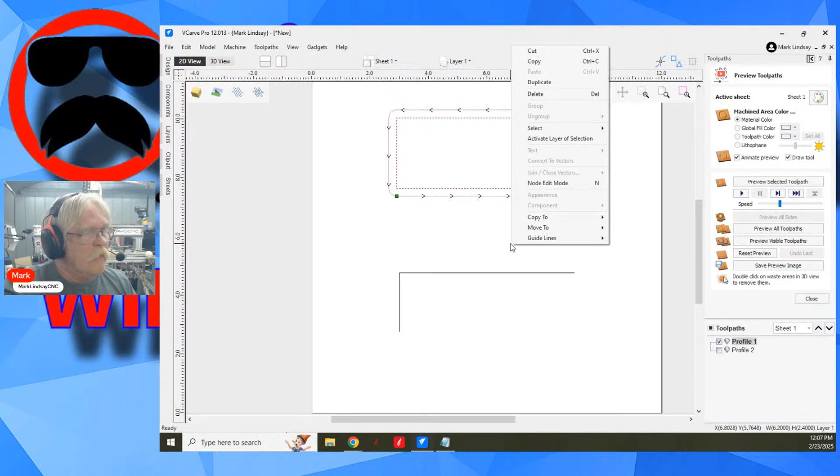The way we do that is we go into the 2D view. Now here in the 2D view, we can see that we've got a check mark in this box over here. If the toolpath is highlighted, like this one is, we can see that gray box around it - that is selected. The check mark means it's visible.

And that does make a difference. For instance, up here we can preview the selected toolpath. So if I click this, it's going to preview this toolpath because it's selected. If I uncheck this and check this one, I can preview the visible, and it's going to preview this one, even though this one is selected. There's a difference between visible and selected, is my point.

Now, neither toolpath is visible, but this one is selected. It does make a difference. It also makes a difference when you go to save G-code. Now, what we want is the toolpath visible, so we'll put a check mark in the box here.

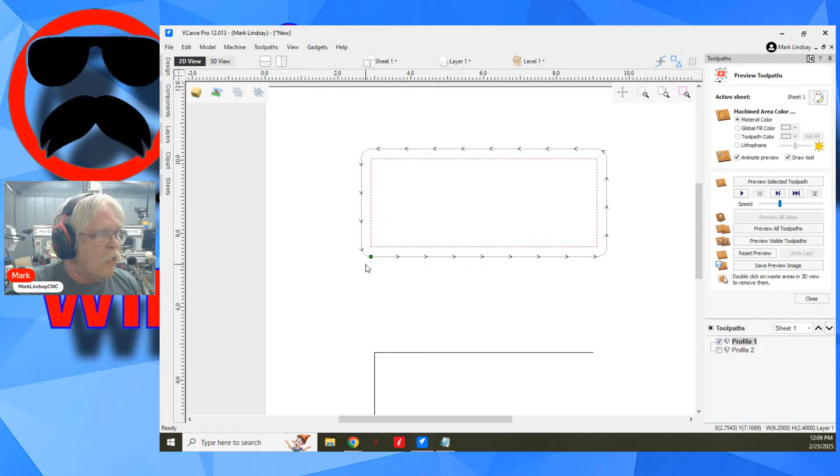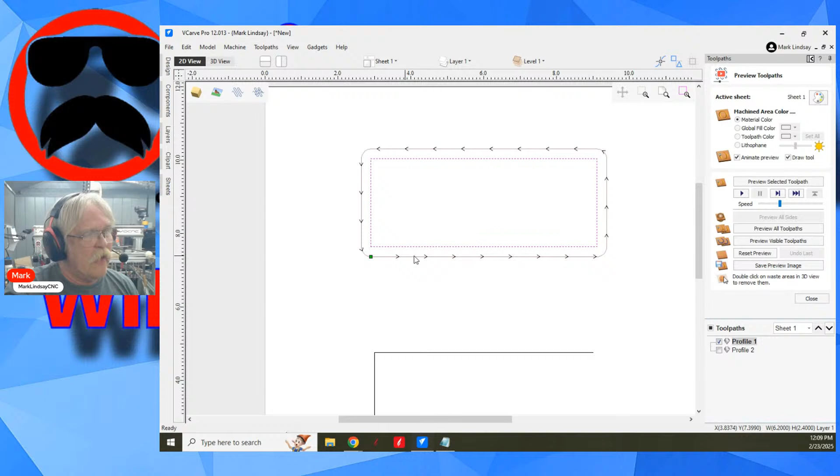Now we have two ways of showing this toolpath, where it is and where it's going to go. We can toggle that by coming up to this icon right here in the 2D view - toggle the toolpath 2D view drawing style, wireframe or solid. This is a wireframe, drawing that toolpath as a wireframe. Now if I click on that icon, it switches over to a solid view.

This is showing you exactly where that tool is going to cut. With no allowance offset, it's cutting right along this vector. It's also leaving square corners because I have that selected in the toolpath. But you can see exactly where that tool is going to cut.

Now, if I double click and go back into this toolpath, I'm going to enter a big allowance offset so it's real easy to see. We'll say 0.1, and it's a positive number. We're cutting to the outside.

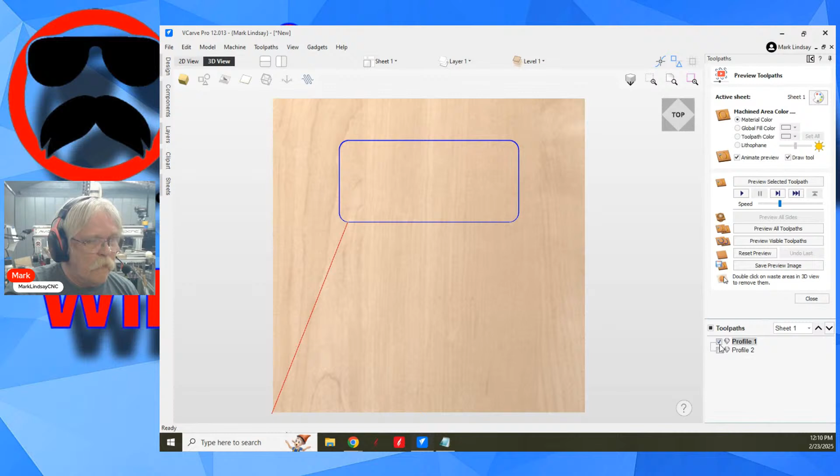So when I calculate this toolpath, it's going to send me back into the 3D view and it's going to make that toolpath visible. When I go back into the 2D view, you can see where this toolpath is cutting out here. So a positive number makes it cut further to the outside, because, again, it's a closed vector and I selected we're cutting to the outside of the vector.

If I go back in here and make it a negative number, it's now going to cut to the inside of that vector by that negative 0.1. Go back into the 2D view, and there we go. Also notice when I cut to the outside of the vector, it didn't make sharp corners. When I cut to the inside of the vector, it did make sharp corners.

So when would you use this? You would use this as a way to leave a little bit of an allowance. For instance, if you had a 1/4-inch hole and a 1/4-inch dowel, you know that a 1/4-inch anything is not going to fit into a 1/4-inch hole because they're the same size. So you could cut a 1/4-inch hole with a slight positive offset.

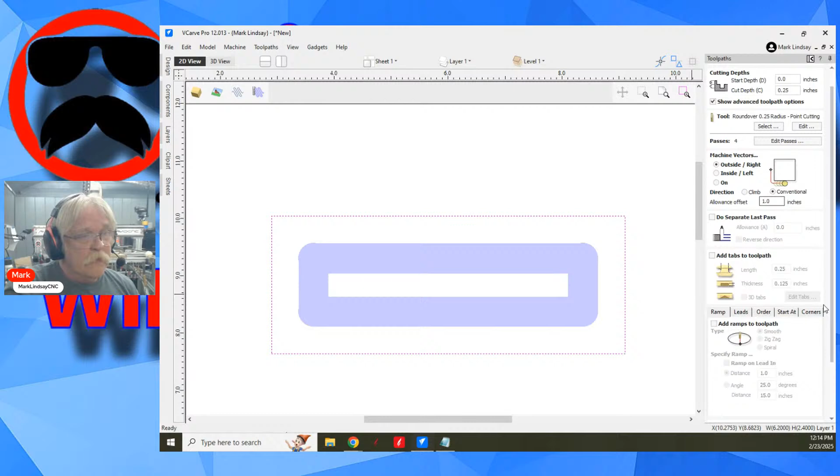And if I went to the positive and calculated, obviously it's going to cut an inch out. And again, here I would just redraw the vector. So that's on a closed vector.

And again, you access that by putting a check mark in the box here to make your toolpath visible, and then you use this last icon over here. It's going to, by default, open as a wireframe, which is this straight line with all the arrows. You click it, and it'll switch over to solid. This way you can see exactly where that bit is going to cut and how much room you'll have.

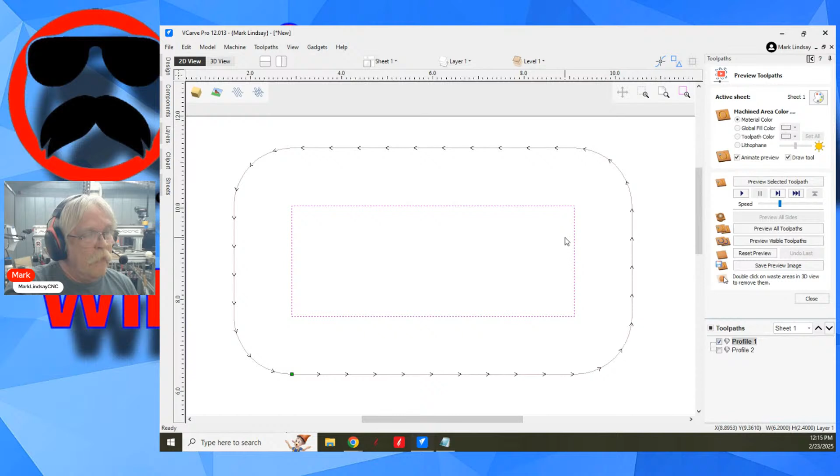So now it's a little bit different when we get into open vectors. We'll go into this toolpath here. Again, I have no allowance offset, but I've clicked to the outside right. When you're dealing with an open vector, now we're talking right and left, not inside and outside. This isn't closed, there is no inside or outside. You're either going to the right or to the left. The right or left of what?

Well, this is a tip I try to share with folks when you're first getting started. We'll go back into node editing here a minute. Tap the letter N on my keyboard. And again, this comes to this start point and this arrow. To figure out whether you need a negative or positive offset, or if you want to cut to the inside or to the outside, imagine standing on this point and looking in the direction of the arrow.

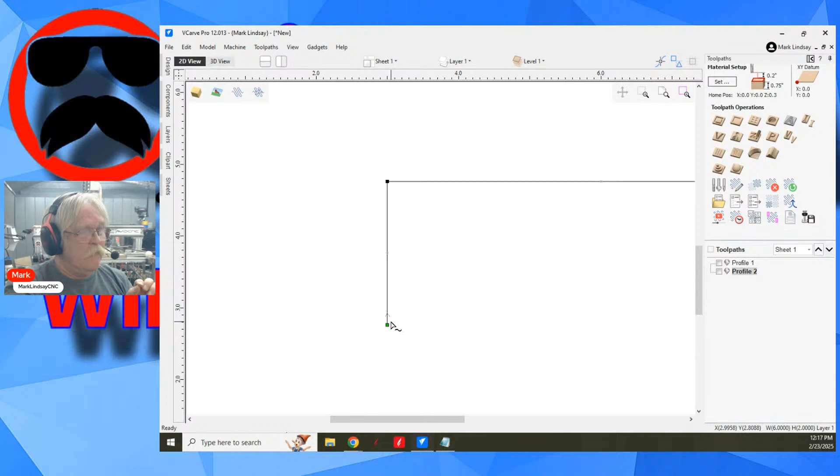Negative is going to go this way. Positive—excuse me, I got that wrong—positive is going to go this way, negative is going to go this way.

How do I know that? Because we're dealing with an open vector. If I go to the outside right, it's going to go here. A positive offset is going to make it move further to the right. If I go here, it's going to cut to the left of this vector. A positive offset is going to make it go further to the left. A negative offset is going to bring it back over this direction.

Let's make sure that I'm correct here. I've got it set to the inside to the left, and I've just added a positive allowance offset of 0.1, so it should go further over this way. Let's see. We'll calculate it, then come over here to the 2D view, and go into solid. And it did — it moved further to the left with a positive offset.

Wouldn't that depend also if you're doing climb or conventional?

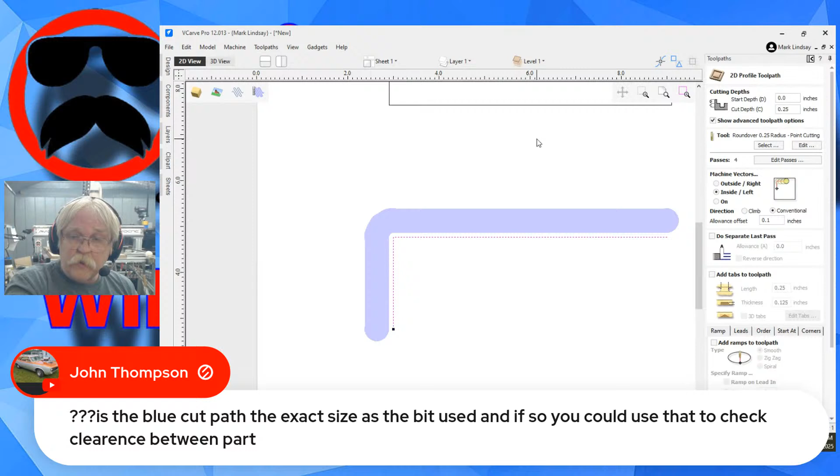Now, John just asked, is the blue cut path the exact same size as the bit used, and if so, could you use that to check clearance between parts? Exactly, yes. The blue cut path is the same size as the bit you have selected, and you can use that to check clearance between parts. In fact, I do that a lot. I use that to see how much clearance I have between parts to see should I put tabs here or not. So I might put a tab over here on this vector and then put a tab over here on this vector. That way I'm not just cutting through one tab to make another.

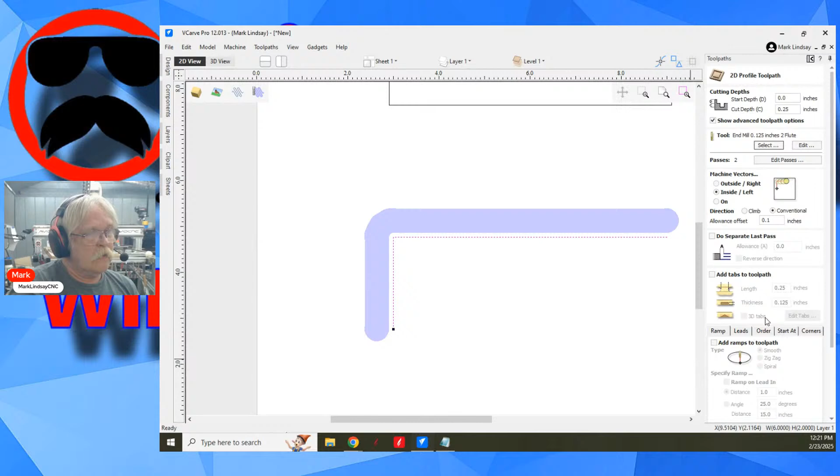So if I select, I didn't realize I was using a point cutting radius bit, that made that blue line width this width here, the diameter, 0.53 inches. Wow. Let's go with an 1/8 inch end mill. Select. And now let's calculate it. Calculate 2D view, and you see that blue is a lot narrower. But it's showing you the width of where the cutting diameter of that bit, where it's going to cut.

Now, if I come back in here and I just change this to a negative number, I'm still cutting to the outside, but now I put in a negative 0.1 offset. It's going to come back to the left. Or excuse me, to the right. I was in the Army 9 years. I should know my left from my right.

And it created sharp corners. So if you're cutting to the outside, obviously it's going to be a little bit different with a negative allowance offset.

It's going to bump over this way 0.1, which is almost the diameter of that 1/8 inch bit. So where I'm going with this is this allowance sets where this is going to cut, actually, when it goes to cut the vector. If you click on the vector, allowance offset is grayed out. You can't enter an offset. It's going to cut on that vector, no matter what you have in here. It's grayed out, I can't change it.

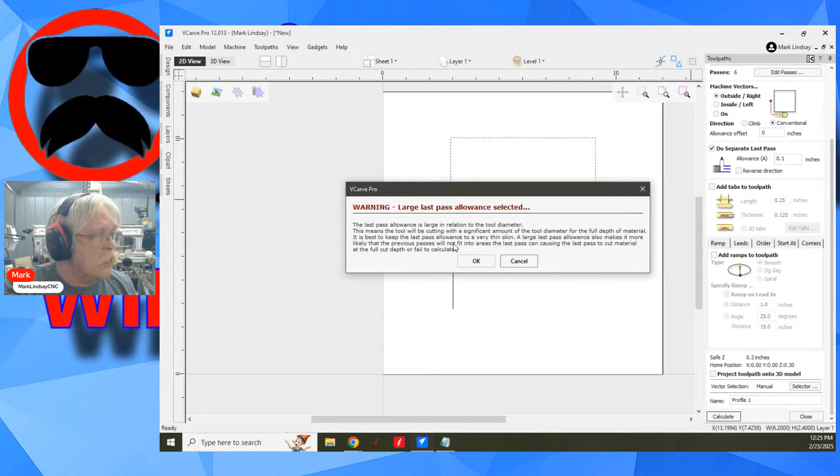I'm doing a separate last pass with an allowance of 0.01, that's 10 thousandths of an inch. Okay, in fact, I'm going to make it bigger, I'm going to go ahead and make it 0.1 just so it's easier for you to see. Now, you do not have to do a separate last pass, but I almost always do. We'll calculate it. Yeah, I know that's large. We'll do it anyway. Now, if we look at this,

we can see that we have one pass here that's inset. It's way, way inside of these other tool paths. And we can see we have two wireframes here.

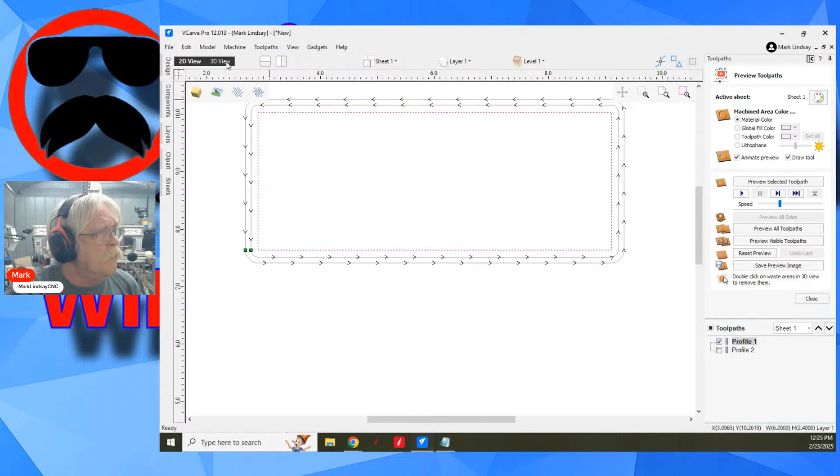Now I can put it on solid, but we can't tell what's going on. So I'm going to leave it in wireframe, but jump back over to the 3D view because that gives me a good look at what's happening here.

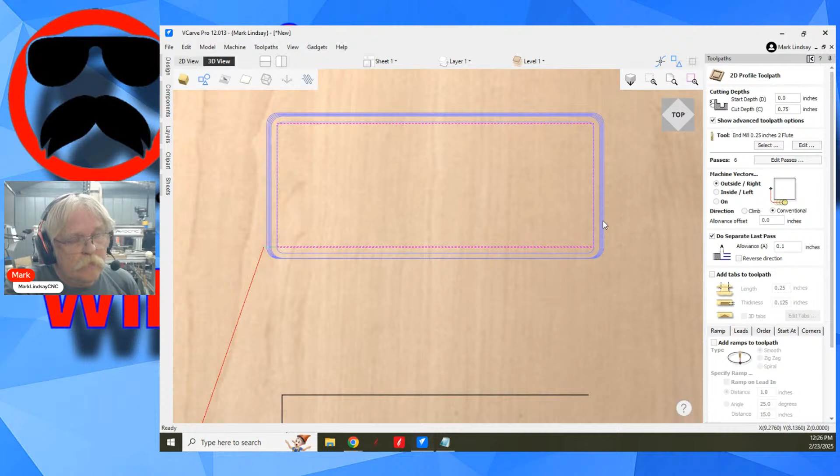What we're doing when we do a separate last pass with that allowance, it's going to take 6 passes. The first 5 are going to cut way outside this point 1, cutting it larger than it needs to be. So these first 5 passes are going to be cut big, cut oversized, that point 1 outside.

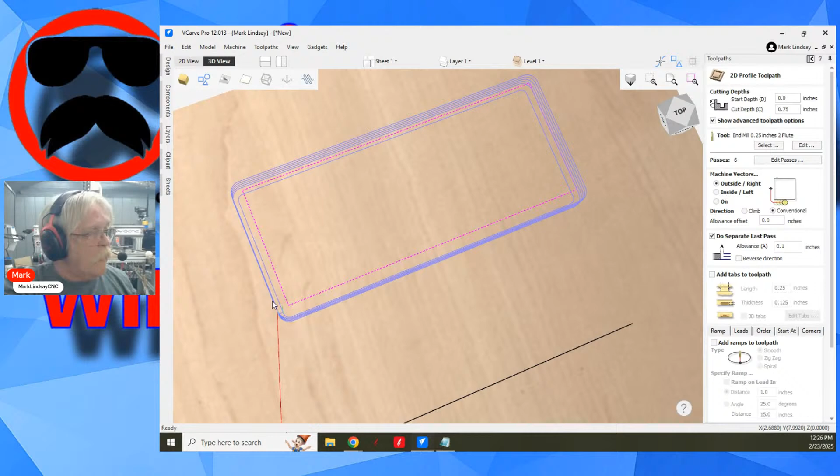Then that last pass is the lift it up here. Here we go. It's going to get around to this 5th pass and retract all the way out of the material. Move in, you can see it right here. Move in, then plunge down and make that last cut to the actual size of the vector.

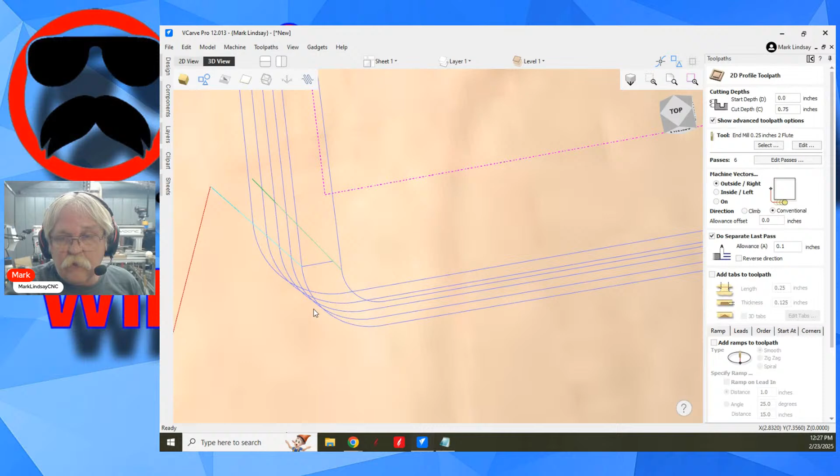Now, overall, in general, if you've ever taken a look at the edge after you've cut something out with a profile toolpath, you can sometimes see a little divot on the edge, and then little tracks all the way around as the bit has cut each depth in each one of these passes.

Doing a separate last pass with a much smaller allowance, I almost always use 0.01, no matter what diameter of bit I'm using. I've done this on all of my CNCs, from my first plywood CNC up to the Gatton CNC, now to the Avid. It will make one pass, cutting the full thickness of the material all at once, but it's only trimming 10 thousandths of an inch off of that full depth in one pass. It will remove all of those little witness marks and all of those little ramps if you use ramps and what have you. But I almost always use an allowance of 10 thousandths of an inch.

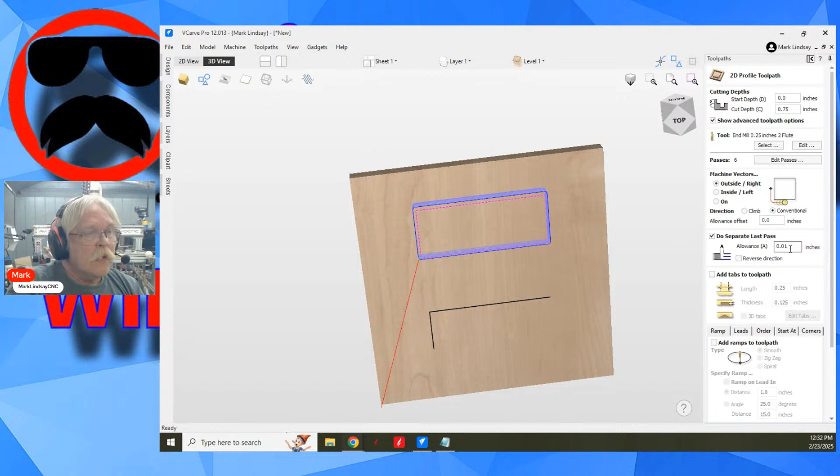I very seldom use a separate last pass if I'm not cutting all the way through the material. And also, this allowance here has nothing to do with this other allowance. This allowance is where the bit is actually going to cut on the material all the way around. This only affects a separate last pass. They will work together.

I'm assuming this is an addition to the initial allowance. Yes, if you have an allowance entered up here, it will calculate with this. You can use them together.

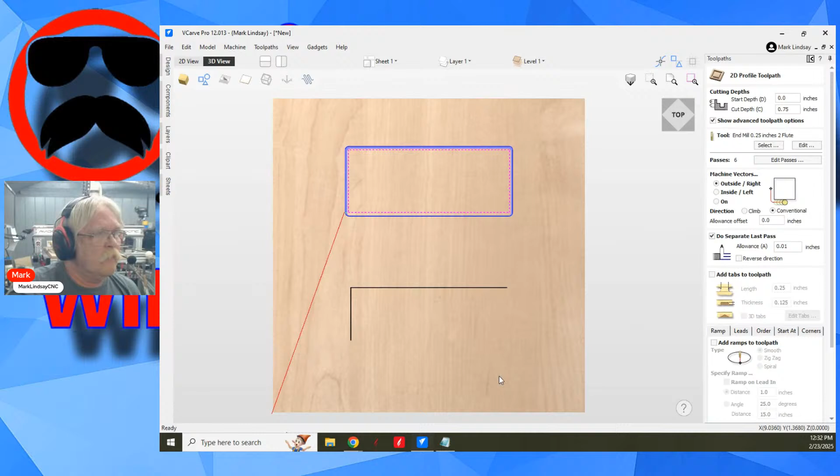So it's one of those if-you-prefer type of things. I very seldom use a separate last pass. In fact, I don't think I've ever used a separate last pass when I wasn't cutting all the way through the material. But that doesn't mean that I won't, and it doesn't mean it can't be done. You certainly can. It's just that I haven't really seen the need to, because if I'm using a profile, say, to drill a hole, it's usually because something is going to go in that hole.

Okay, let me go ahead and close this up. So I don't know if that helps you out, Kurt, or not, but there it is.

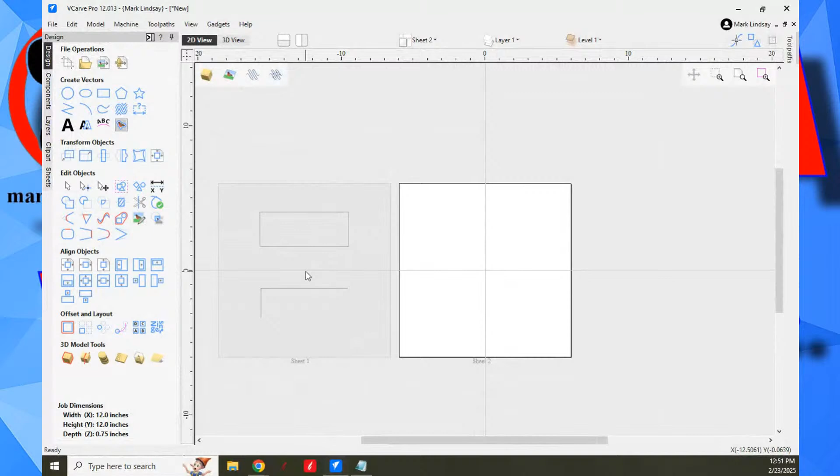Now, when you would do this, I don't know, but you may find an application for it. I'm going to go back over here into Sheet 1 by double clicking. I'm going to select that vector, then right click it, and copy to Sheet 2. So now I have that vector in both places. I'm going to come back over to Sheet 2.

I could do whatever I want with this. I could do a pocket here with an allowance offset—an allowance offset in a pocket is the same as in the profile. I could do a pocket in here, then come back over here to Sheet 1, and this is my profile. I'll do a positive offset to cut 1/8 outside, but back over here, I'll do a negative offset to cut further in, so it leaves a 1/4 inch wall. So I can do a negative offset of 1/8 of an inch and a positive offset of 1/8 of an inch, and I have a 1/4 inch thick wall.

Does that make sense? John Thumb is asking, what's the difference between sheets and layers?

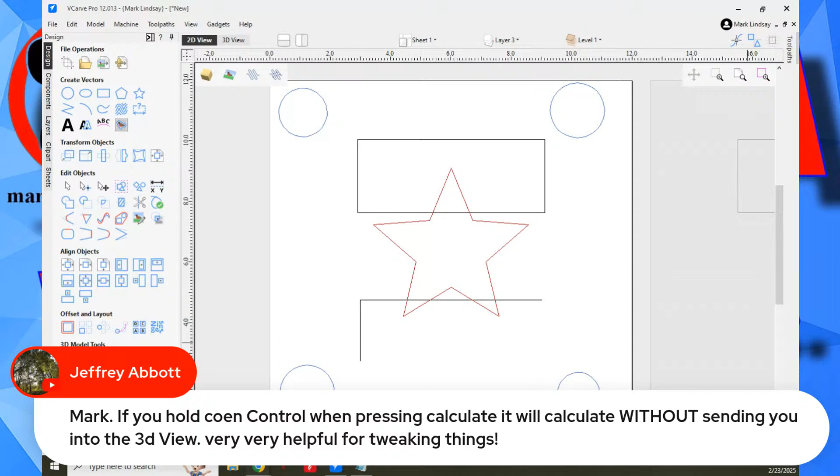Okay, now Jeffrey Abbott, I was trying to remember how to do that. If you hold down Control while pressing Calculate, it'll calculate without sending you into the 3D view. Very helpful for tweaking things. I knew there was a way to do that, I just couldn't remember what it was. Thank you, Jeffrey. What he means is if I go over here to Profile Toolpath.

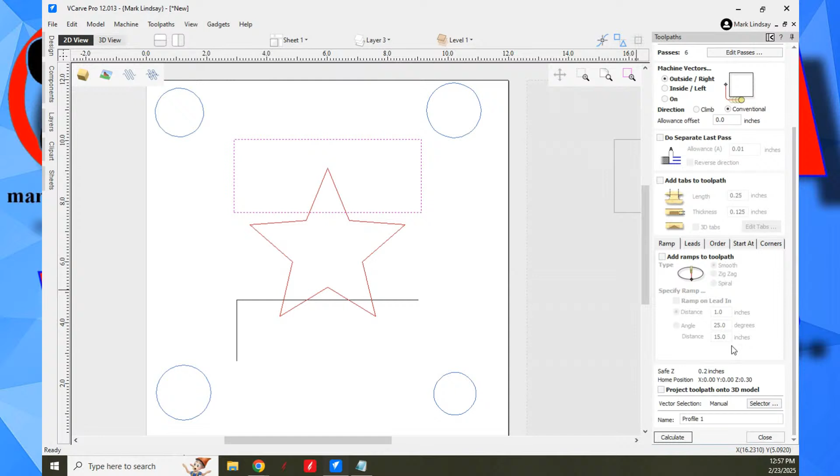I'm going to turn off Do a Separate Last Pass. And I'm going to hold down Control and click Calculate, and it doesn't automatically jump into the 3D view. I can see where that toolpath is going to cut.

Thank you, Jeff. I knew that there was a way of doing it, but it has been recalculated. So, all right, let's see here.

Do layers stay with sheets? Not yet. Not yet. That's coming in 12.5. But you didn't hear that from me.

Let's see here. Let's see, hey Mark, how do you like version 12.013? Is it worth the 287? Does it make inlays simple?

I have not done an inlay. I will be this year. In fact, I'm playing around—no, you can't see it from here. Well, yeah, you can see it from here. Right back there, there's a piece of MDF laying against a wall. I'm doing some testing right now. Not quite ready to do a video yet.

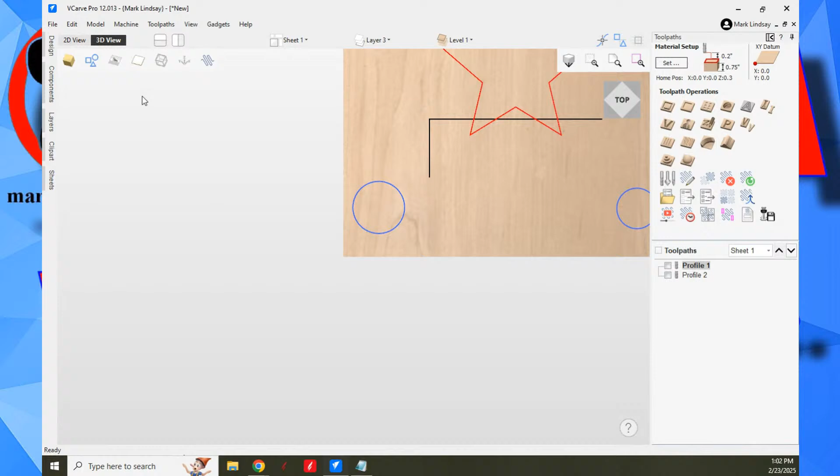All of these icons that I'm showing you up here, like how to go into the 3D view and turn on vectors showing in the 3D view, that's 12.0. You can turn them off or on. You can move and edit vectors in the 3D view, decrease a radius or increase a radius. There are all kinds of things you can do with vectors in the 3D view now that you can't do in the older versions.

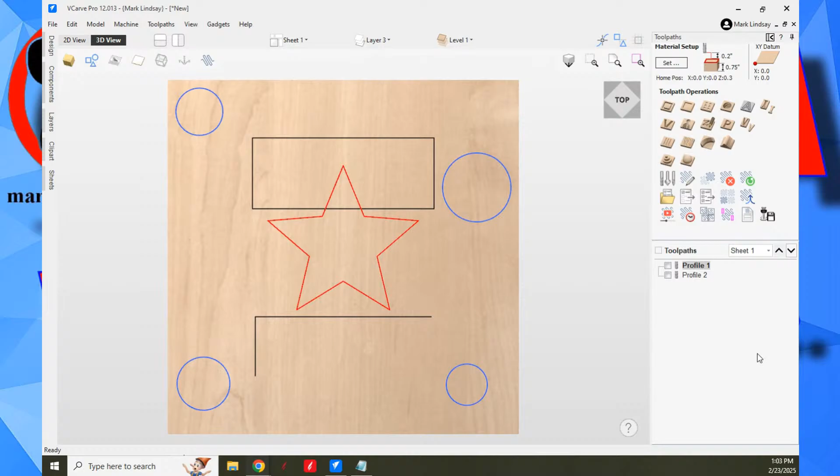There you go, Martin Pearson has the answer. Download the trial version of 12.0, play around with it, and see if you think it's worth it to you. My personal opinion, I think so. I really do. I think it is. I was skeptical at first.

For instance, I was talking about sheets a couple minutes ago. When they first came out with that, I thought, okay, that's cool for people that need it, but when would I ever use it? The very first project I made was that walnut shelf, and I needed it. I used it. And now, I wish I had it all the time.

Is there a permanent offset that can be applied to center an add-on laser attachment? Do that in your controller software, not Vectric. Now, I don't have the laser module. I don't have a laser.

Before you invest in the laser module, go to the Vectric website and look at the laser module. There's a list of lasers that it supports. It doesn't support every laser out there, and it only supports lasers that are attached to CNC routers. It doesn't support a separate laser as its own machine.

How do you get to be a beta tester? They invited me. I don't know why, but I'm very, very grateful.

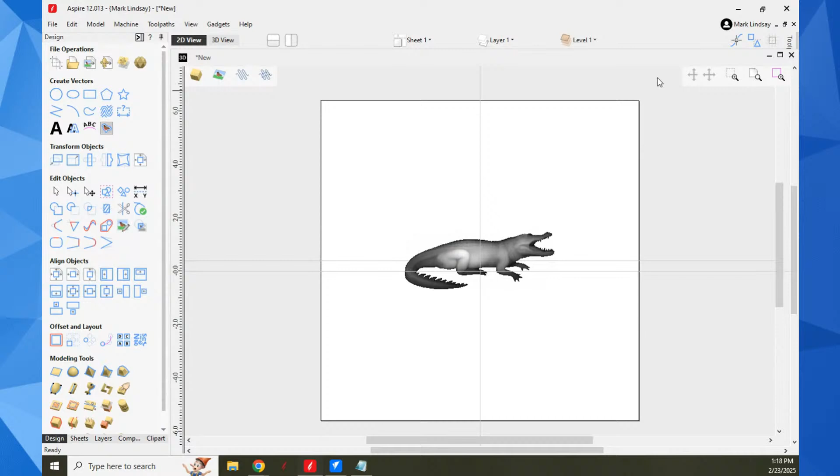The only thing you can do with a 3D model in VCarve involves these tools down here. You can resize it, slice it, create a cross section from it, or draw a vector boundary around it.

You can smooth selected components, scale your Z height, and add a zero plane. That's all. So again, VCarve is not 3D modeling software.

So let me cruise up the road here and see - did I miss a question? I don't think I did.

I don't think I... nope, I don't think I did. All right, so...

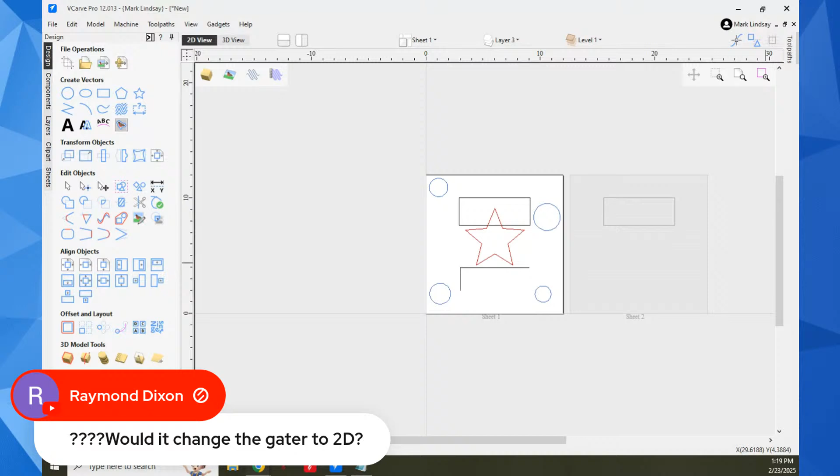Would it change the Gator model to 2D? No, it would not change it to 2D. It would just completely remove it - removing all of the 3D content and any 3D toolpaths you've calculated.

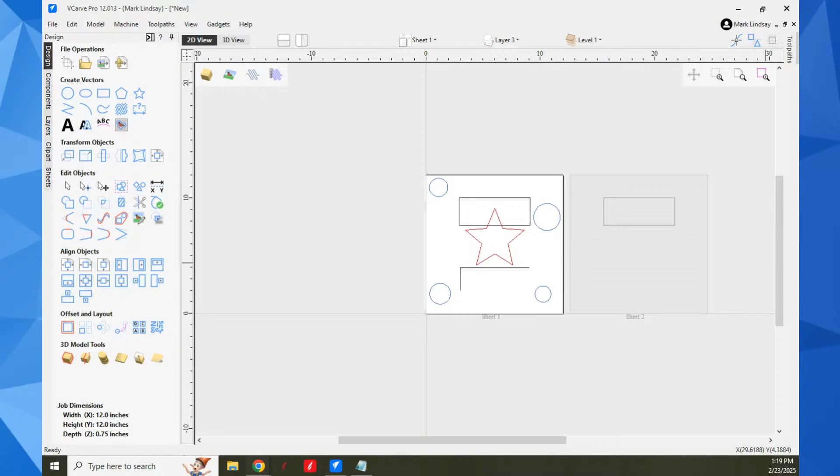They do that to avoid the situation where one guy in the makerspace has Aspire and is making 3D models for all of his buddies. Now, he could export them as STLs, but that's a different subject - you can only import one STL into VCarve. And I don't know why I'm still sharing my screen.